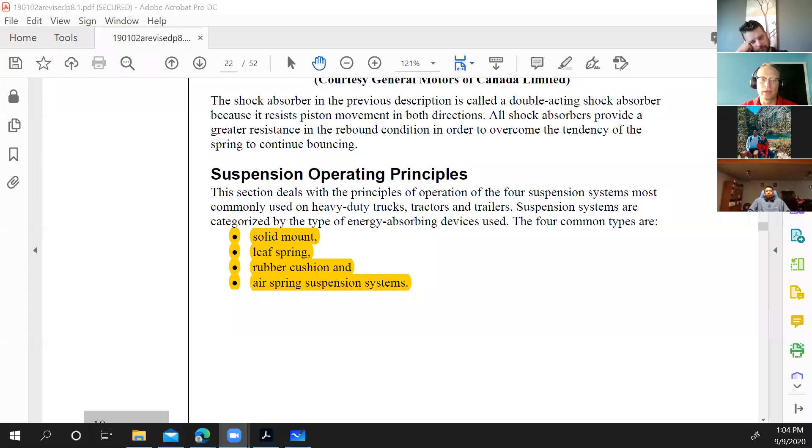Now I'll share the screen. There we go. Can everyone see where we left off? On suspension operating principles.

Sorry if I keep coughing. Water here. One of the downsides from working from home for me, I think, is there's too many cigarette breaks too easily. So having to leave work to smoke is probably a good thing for me.

Anyhow, the operating principles of suspension. So the 4 different types of suspension, we talked about 3. The one we didn't talk about yet is a solid mount suspension. Does anyone work with off-road machinery? I'm hoping there's at least 1 or 2 of you who work with off-road equipment.

So typically you'll have what's called a solid mount suspension. So there won't be any particular energy absorbing device, as in there won't be a leaf spring, there won't be an express rubber cushion, and there won't be air springs. What you might see is rubber bushings. They wouldn't be rubber cushions, though. And so a little bit different suspension.

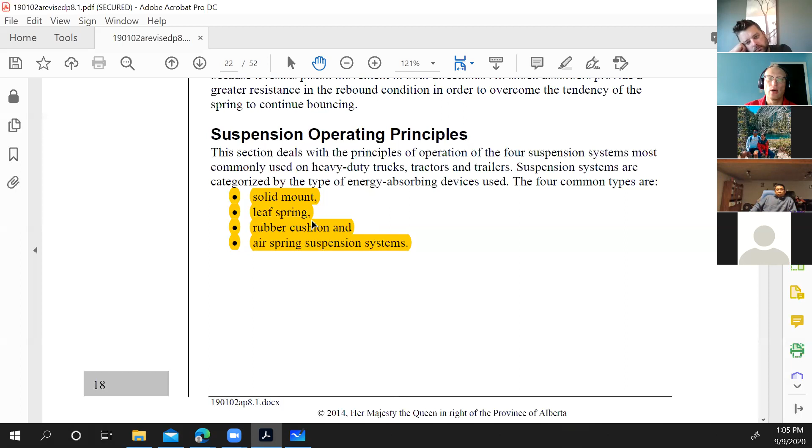Something common for everyone to think about, something we talked about a little bit in section 101, is forklifts. Forklifts have a solid mount suspension. That's because you don't want them to move around so much. So all of the shock absorption happens in the tires, different types of tires you can get with them. Indoor and outdoor ones.

So we're going to talk about how solid mount works, as well as leaf springs, rubber cushions, and air springs. Those are the 3 most common types you'll see, as well as the solid mount. So units that have solid mount suspension will typically have a high center of gravity, operate in an off-road environment or rugged terrain, and require long suspension travel.

So solid mount suspension, yet again, might be where the tracks attach for a bulldozer, that they're on with essentially bearings, so they can move quite freely based on the position of the unit, right? It depends on application.

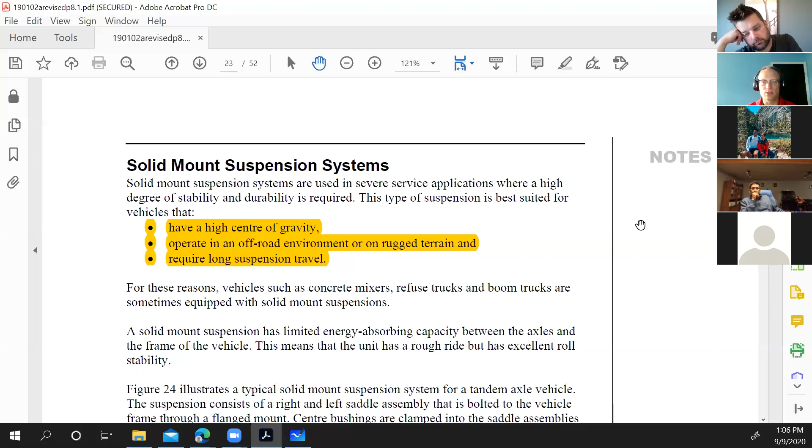For us, for on-road, anything that's going to have a solid mount suspension is either going to be really heavy and really awkward, so they don't want it to move much, as in a forklift, or off-road environments, so really rugged terrain or really rough stuff, and it would beat the heck out of even rubber blocks. So rubber blocks are the next go-to for what's used.

So you can see here is a solid mount suspension. This is a tractor solid mount suspension. You can see you still have the center bushing here. This is where you're going to get your pivoting action. So this is where you get your suspension travel. Okay. They don't want any rubber blocks or springs or any other types of devices in here to limit this travel. This can move freely up and down that way, and also this one will go the opposite direction. Okay. So this is our solid mount suspension.

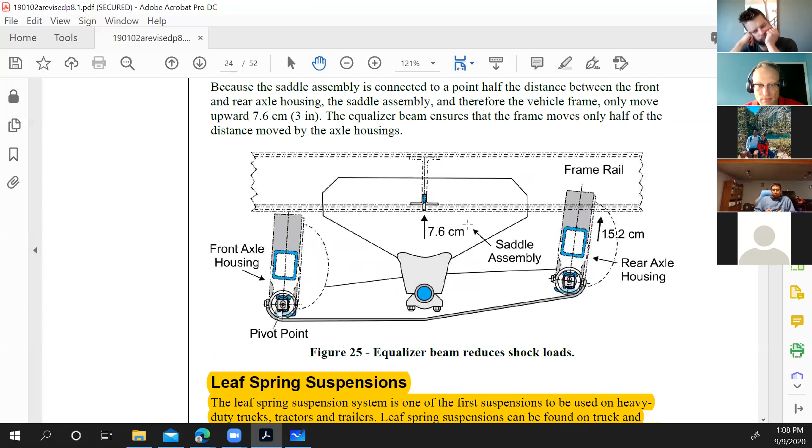What makes it different from any of the other ones, you'll see this whole walking beam assembly underneath here with these equalizer beams and these beams here. This is going to be the same in all of these pictures. What makes it different is this saddle assembly here. That's where you would typically have your energy absorbing device. So what I was mentioning there, solid mount suspension with the saddle assembly here.

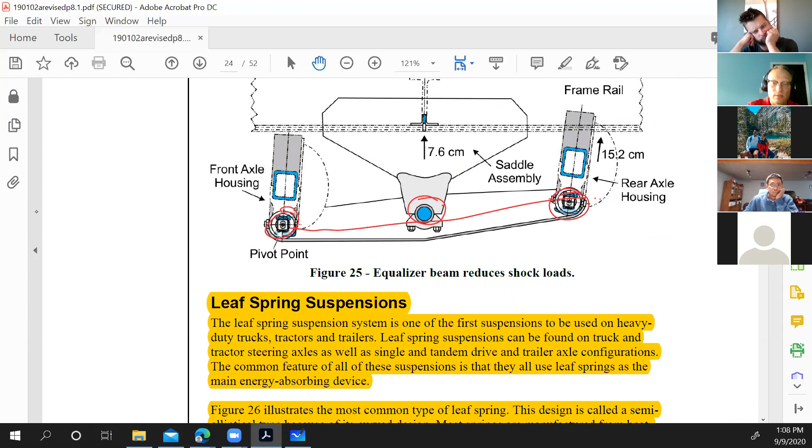What it's going to have is a long suspension travel. The way it does that is through this beam and the pivot points here and the pivots here as well. Okay, that's how it attains this. Now, they call it an equalizer beam because it equalizes the amount of travel.

So what they're saying here, they don't mention it, is if this was going over a bump, if this side was moving down 15 centimeters, then in order to ride up this bump here, this drive axle had to lift 15 centimeters. The equalizer beam splits the difference.

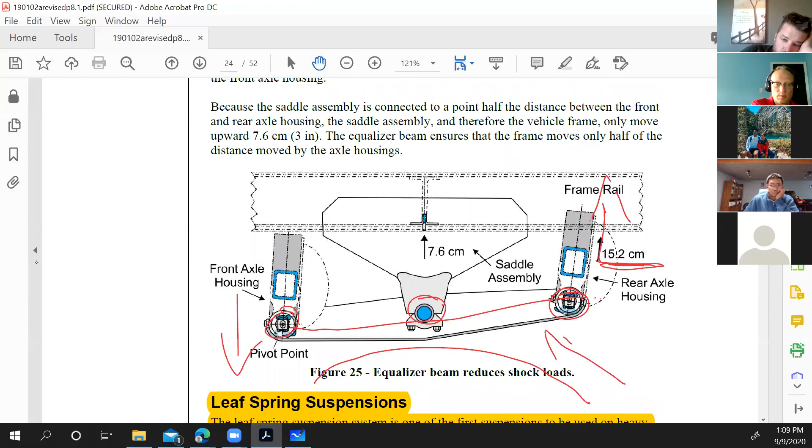Sorry, I just got an email from help desk. That's why I was distracted for a second.

The equalizer beam will split the difference, and the frame will only end up having to lift that 7.6, or half of what this is. Okay. They do have these on 45 tons on the steer axles, actually, these equalizers. Oh yeah, on twin steers.

Yeah, you bet. Would it have a leaf spring right here then as well? 2 leaf springs. So where those rear axle housings are, there'd be connectors or whatever. Yeah, there'd be the leaf springs, one on that side, one on that side, and it's kind of hard to explain, but one's on the bottom, one's on the top, and they act with the springs. Gotcha.

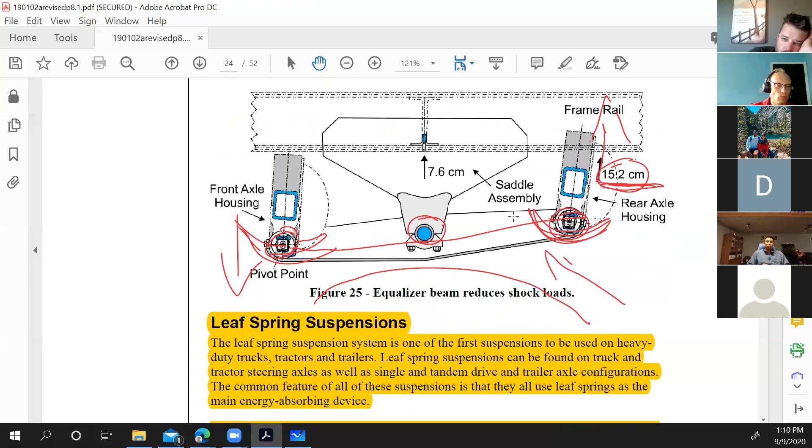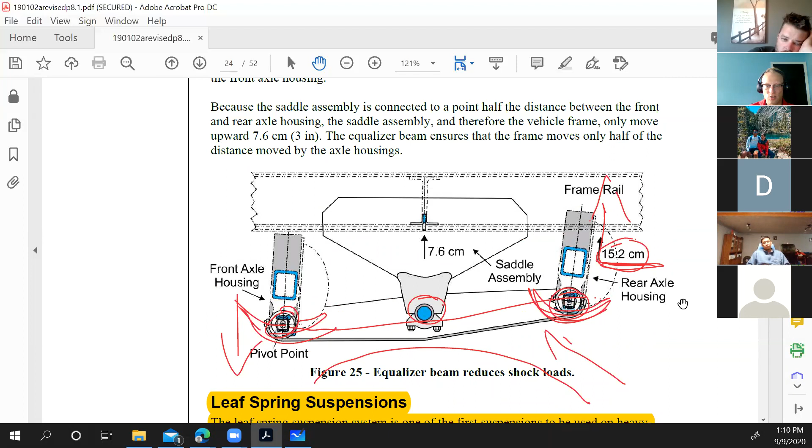Bed trucks are their own beast. They're their own unique little world. So they have their advantages and disadvantages for working on them from our perspective. So we got twin steers, and they even make tri steers now. So depending on where it's designed to go, what it's designed to do, yeah, it absolutely could have something like that on the steer axle. And it might have drive axles that look like this too, right? It can be a twin steer, quad drive, all kinds of crazy things can happen, right?

Sorry, go ahead, please. Savanna Well Servicing has some dog houses with 3 steers. Yeah, it's crazy. It's crazy. It can become a lot, and I mean, just trying to carry more weight is all they're trying to do, right?

So leaf springs, they were one of the first suspensions used. They're pretty basic. They're found on all kinds of applications: trucks, trailers, steering axles, drive axles, singles, tandems, tridems, all different kinds of trailers. On bed trucks, they're all over the place. So the most common type is called a semi-elliptical because of its curved design. In order to make spring steel, it is heat treated specifically to have a spring characteristic. So if you heat a spring, you will lose its springiness, which means it will bend and just remain permanently deformed.

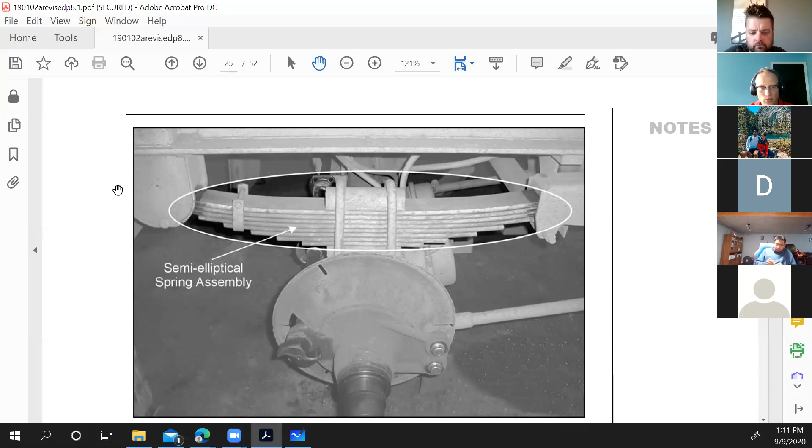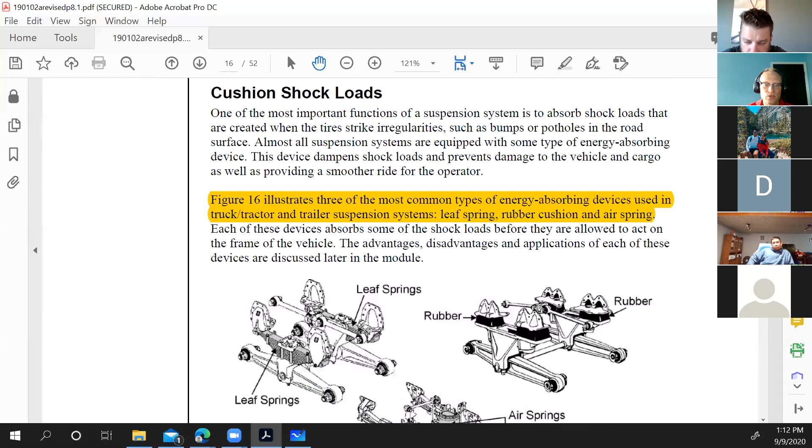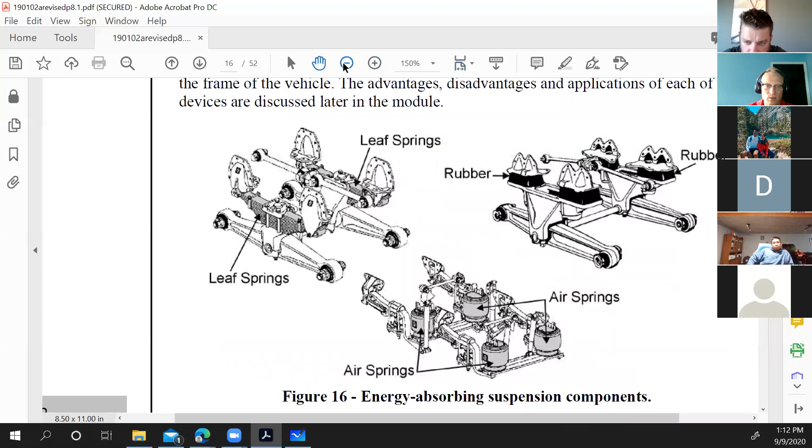So for us in heavy equipment, springs look a little bit different than they do in your pickup truck. Well, they look the same, just a lot bigger. A lot thicker material in each leaf, and typically a lot more leaves in each pack, okay? Something that is quite common in our industry is a leaf spring suspension like this, okay? Similar equalizer beams, and here you have that energy absorbing leaf spring assembly. And we'll get a better picture of that in the next ILM.

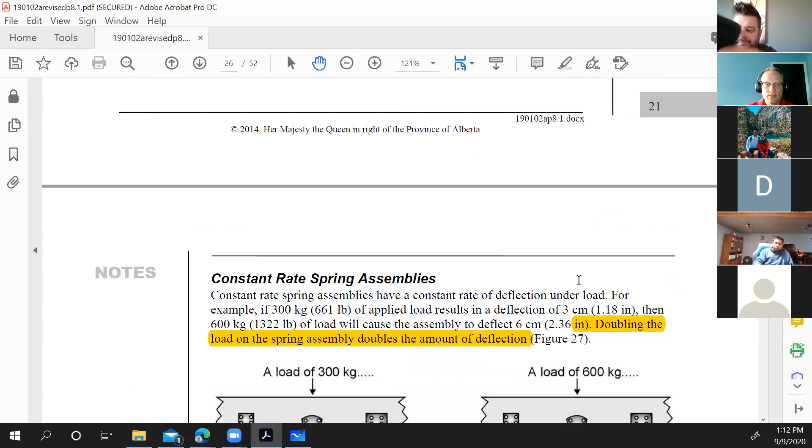So 2 different types of leaf springs that we have: constant rate leaf spring and progressive rate leaf spring. A constant rate leaf spring, no matter the weight you put on it, will deflect or compress the same amount. So if a constant rate leaf spring with a load of 300 kilograms deflects, you can see how it's getting closer together here, right? The arrows are pointing up and the frame is coming down, it deflects 3 centimeters. So if I double this, if it's constant, this should double as well. And we test it and it does. Okay, so that's a constant.

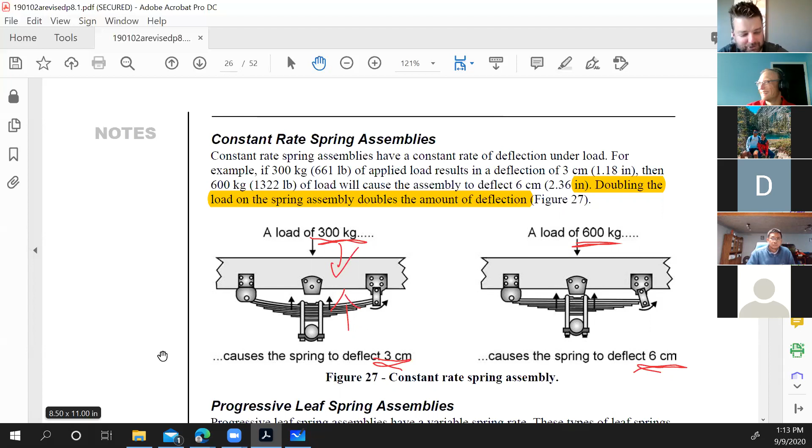Sorry? That was me yelling at my kids again. Oh. Sorry. Mute yourself. There you go. You might even be able to hear things in the background too. There's neighborhood noises around me as well.

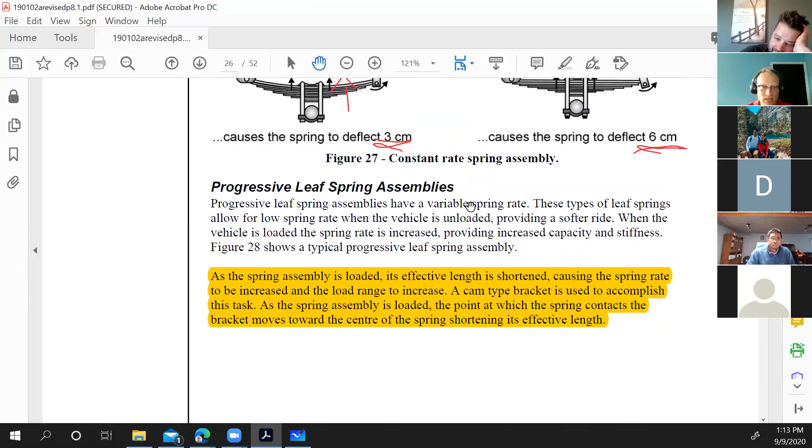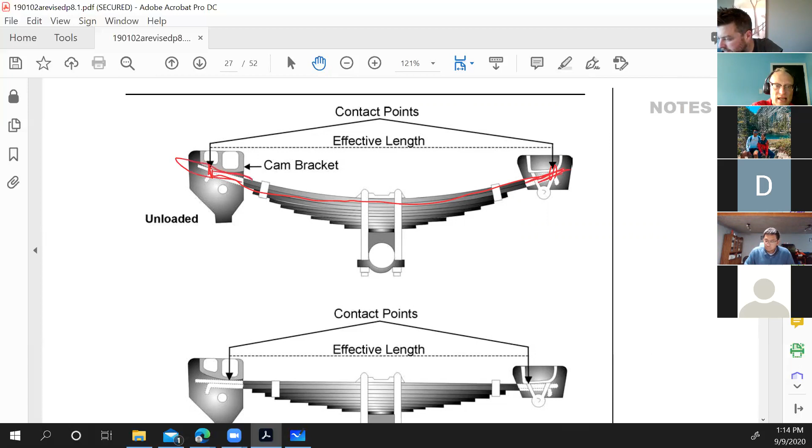As it compresses or deflects, these portions of the leaf spring here and here can slide on these cam brackets. As they slide on the cam brackets, you're changing the point of contact from here now to here, from here now to here. So you've shortened the length of the spring, so it gets stiffer. The higher you load these, the less deflection they get. Okay.

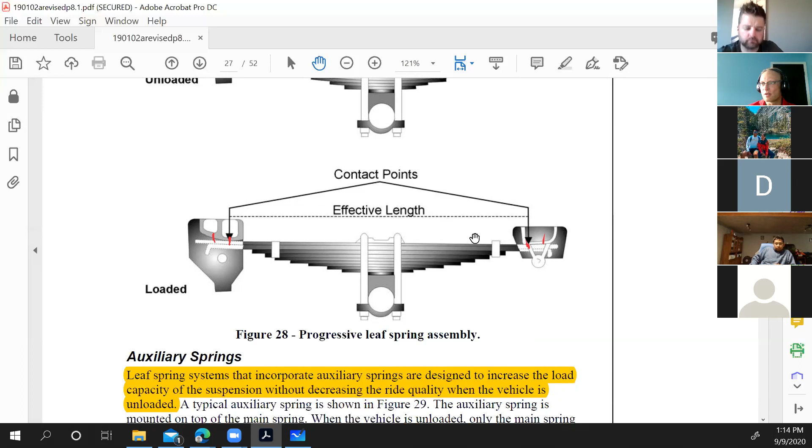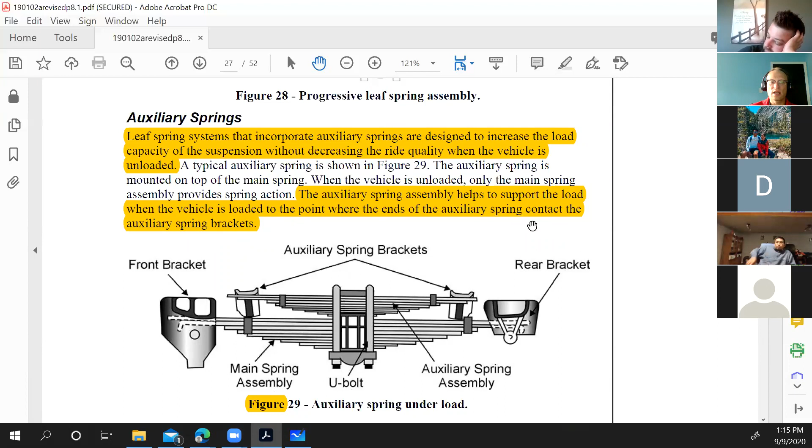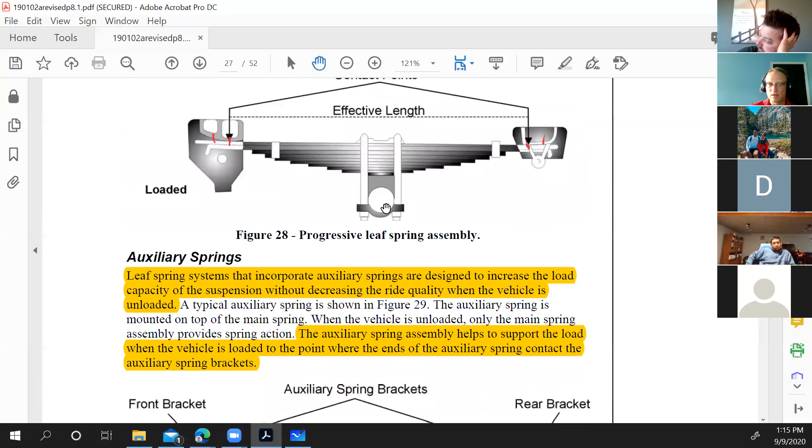An auxiliary spring is just designed to increase the load capacity of the suspension without decreasing ride quality. As you start loading the vehicle up higher and higher, the auxiliary springs make contact, and now they help support the load and help maintain springiness. Because as I keep loading this spring up, it gets stiffer and stiffer. Eventually, it just becomes a solid piece of steel with no spring. This will help bring some suspension travel back. You can see this one's fully extended. This one is as well.

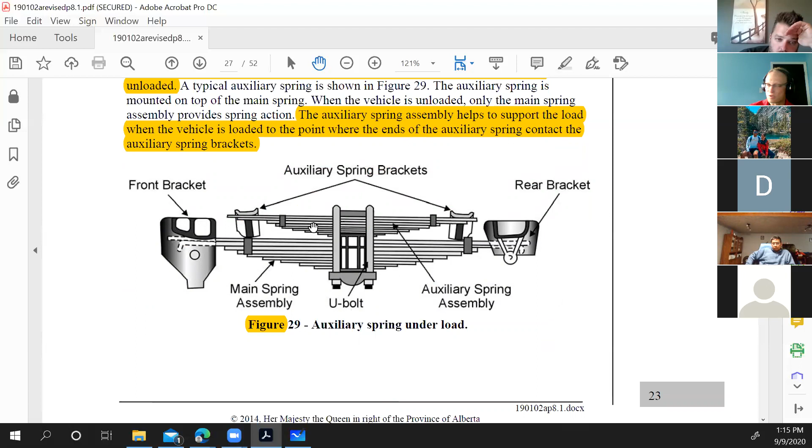Where do we put leaf springs? Most commonly in your everyday highway tractor, pulled off the dealership lot, it's going to be in the steer axles. That's still all over the place. Your front is going to be hooked up with one pivot point. You'll have one here. And in the back, you'll have two. There'll be this upper pivot point, and the lower one will be in the eye of the spring. They'll be connected between the two with this shackle here.

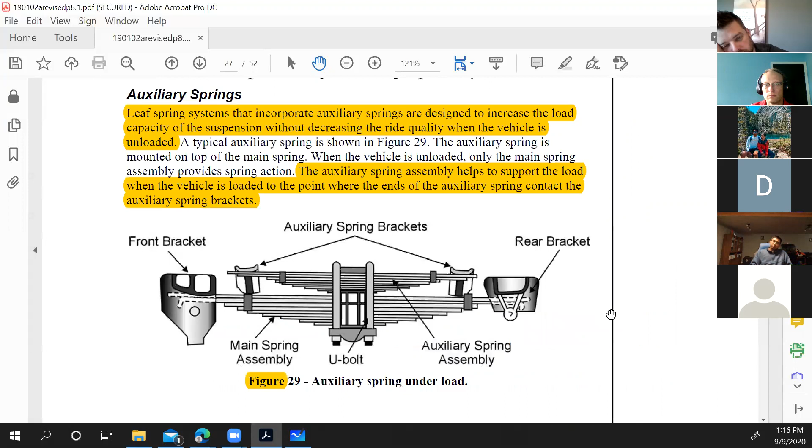Why would we need two pivot points on the rear of this spring? Forward and backwards. Almost. So forward and backwards. Why is something moving forward and backwards? Especially now that I take a look at this picture here.

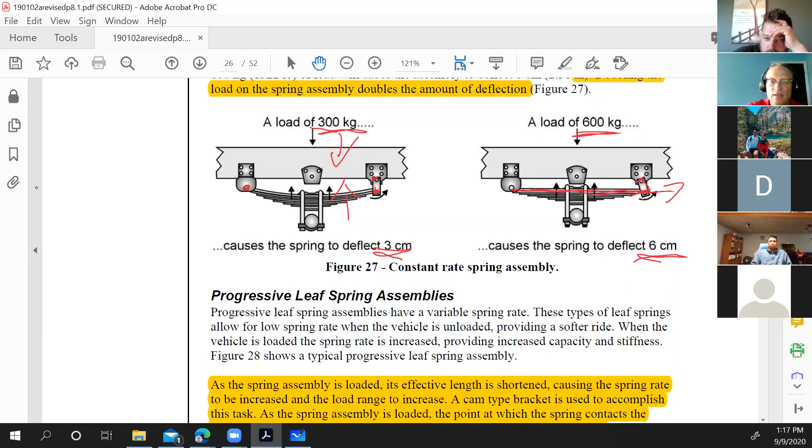Because it gets shorter and longer. Yeah, it sure does. Just like a progressive rate spring, a constant rate spring is going to change the length as well. The thing that doesn't change on a constant rate spring is the point of contact, because we have a solid pivot there, and then the one pivot point there, it moves the shackle back. So the pivot point remains the same, thus the effective length remains the same on the spring. Okay, so that shackle is to accommodate for that change of length. That's how we're going to attain that.

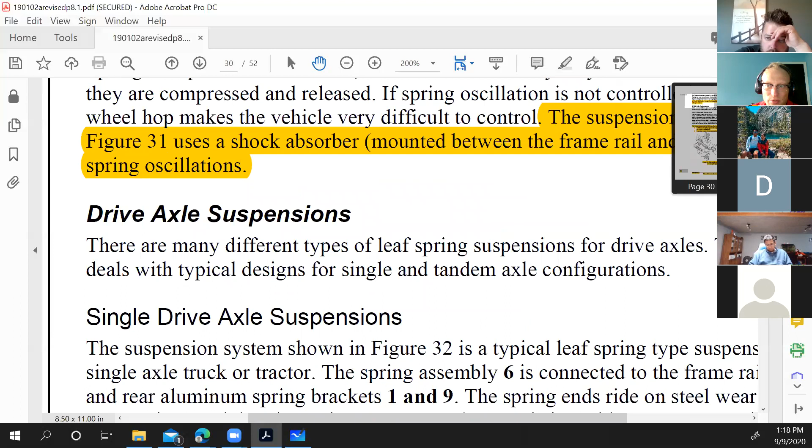Uh-oh, I'm clicking too much. There we go. Zoom out. There we are. All right. So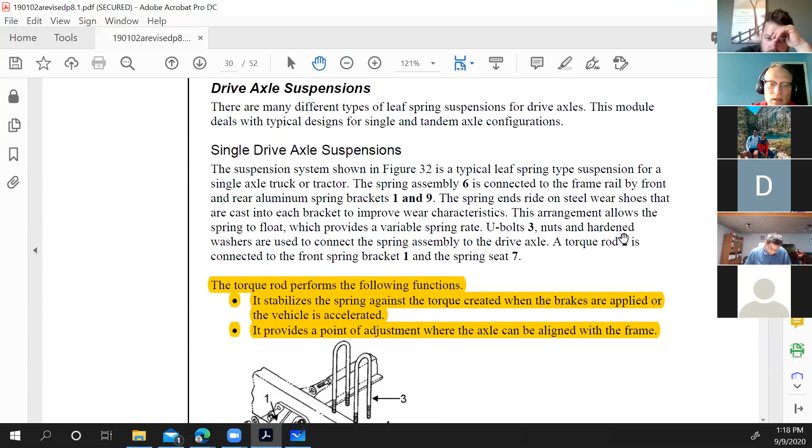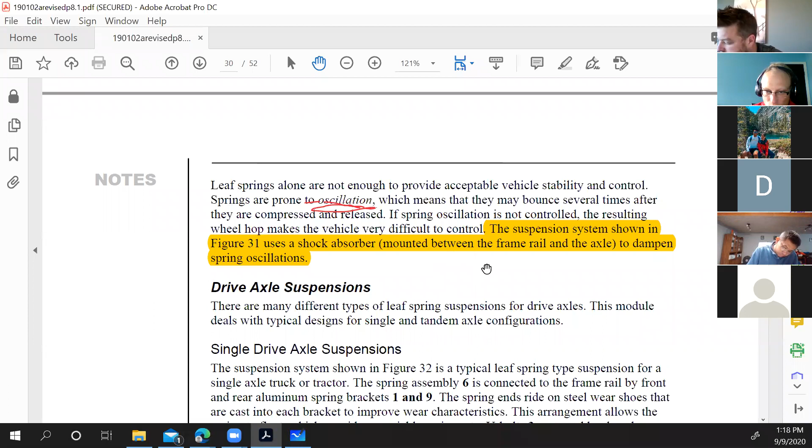They talk here. This is the good paragraph about shock absorbers. So the stability and control is important. Springs are prone to oscillation. Okay, this word is important here, oscillation. It means they bounce several times after they're compressed and released, just about like what I was talking about with that door stopper spring, it'll go back and forth a lot.

So the picture 31, this one here, uses this shock absorber to control the oscillation of the spring, okay? So the spring is what's doing the energy absorption. The shock absorber controls the oscillation of the spring.

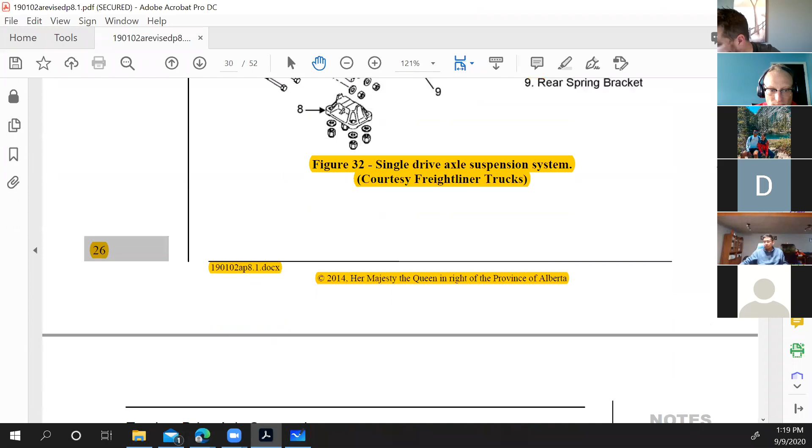Another place where you might see leaf suspensions, but not so commonly anymore, is in the drive axles. Here's a picture of what something like that might look like for a single and for a tandem, okay? Anytime you'd see a tandem, and this is very typical of a trailer, you're gonna see this small assembly here, the equalizer beam. So they act the same function as an equalizer beam in the other instance, they just have springs working between them, okay?

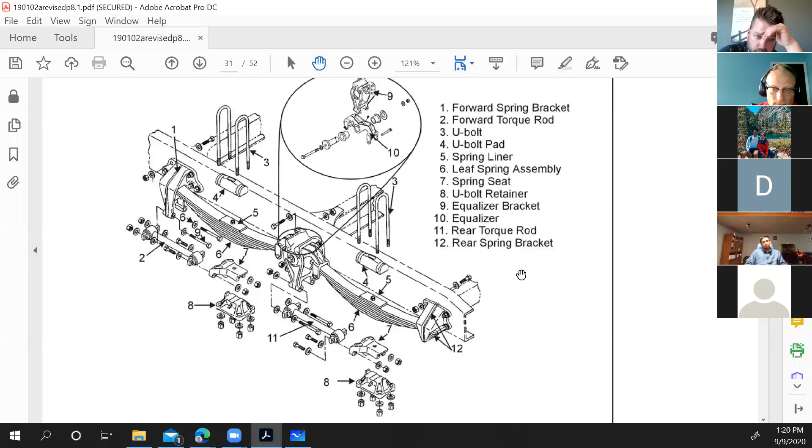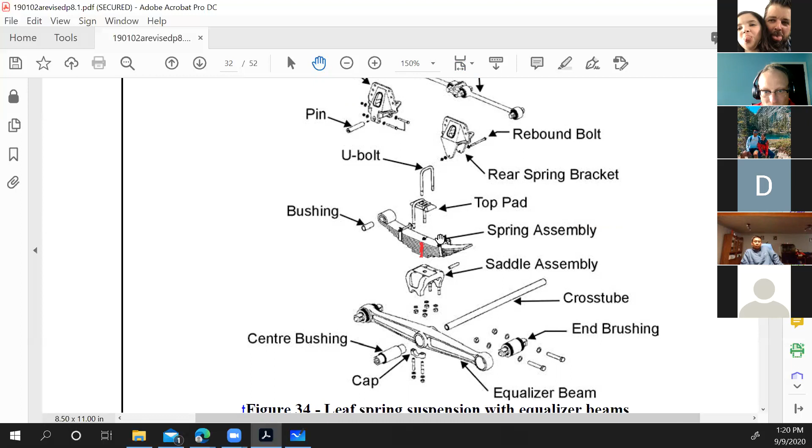And then a different type of equalizer beam single spring suspension. So these ones have an equalizer beam and a spring on each axle. This one has one large spring and then an equalizer beam between each axle, okay? Now, this picture is very, very small. Typically, this spring assembly here that my cursor is on would be 14 to 16 inches thick. So that's this thickness here. It could have 16 leaves and each of them are about an inch thick. So that's a very big leaf spring that's in there.

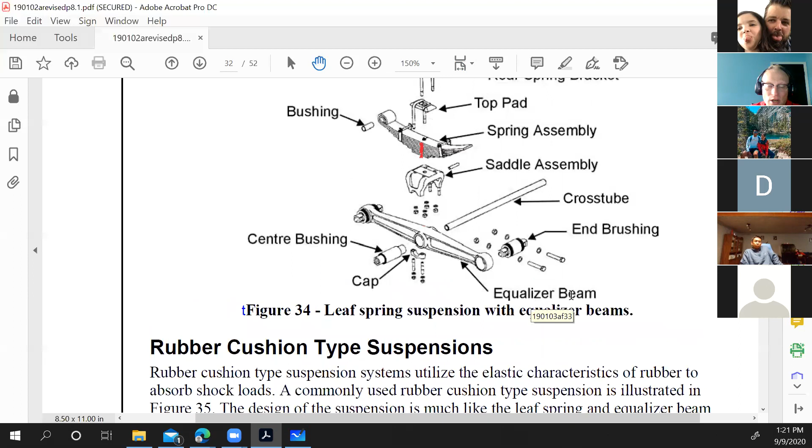Has anyone seen that kind of assembly? Garbage trucks. Mm-hmm. Yeah, I'd have to look at the garbage truck. It was just garbage day today and I didn't look, but next time I'll have to stop them and say, let me take a picture of your suspension. But yeah, I'd imagine a garbage truck would be a good place to have that. And they probably wouldn't even have the biggest ones that I've seen yet. Like, I've seen this on bed trucks and they are very, very, very large.

So for that garbage truck, a big part of that is it's to prevent that lateral movement, because the center of gravity is really, really high on a dump truck, like a garbage truck. And so they have to have that stiff walking beam suspension. If they just had regular bags, they'd be breaking shit all the time.

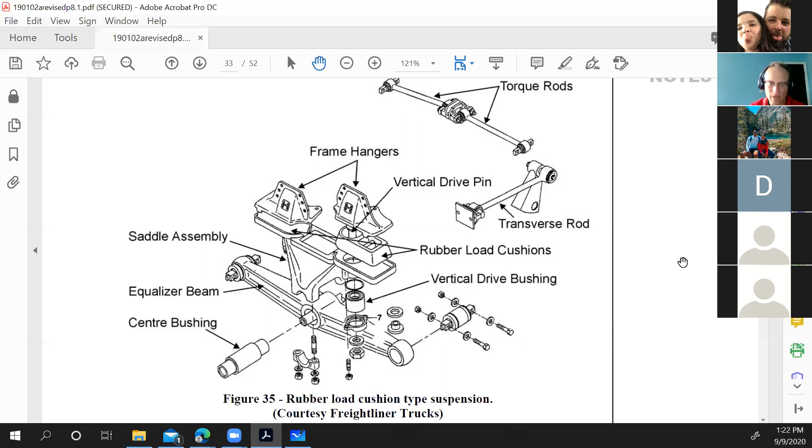Yeah, we are going to talk about airbags, and that is one of the big downsides of airbags is they tend to have a lot of lateral instability because it's just an airbag, right? We've probably experienced or seen on TV what it's like to get on a water mattress, right? Just wavy, it's just a bag of fluid. That's what an airbag essentially is too. So it has a hard time with lateral stability.

First, we'll talk about rubber blocks. So the rubber cushion type suspension, they use the elastic characteristics of these rubber blocks. So if you're starting to notice, so far we've gone from this same equalizer beam suspension having solid saddle up here to having leaf springs. Now we have rubber blocks.

Excuse me, are these where the rubber blocks are located on your units that are out there? Yeah, something like that. It's actually one pad and it looks like an airbag almost, but it's right at the top and it's huge. Not oval, sorry, round. It's almost up here, or right up here kind of thing. Yeah, and it has a big steel hat on it that it looks like it's wearing. You bet, it looks just like that. Okay, just a different kind.

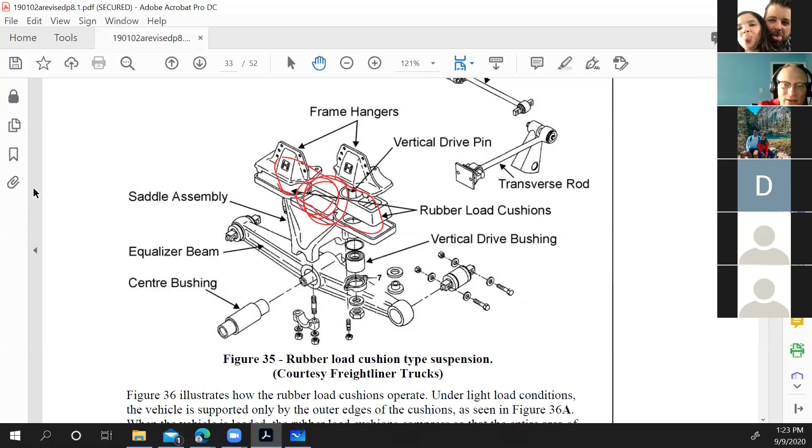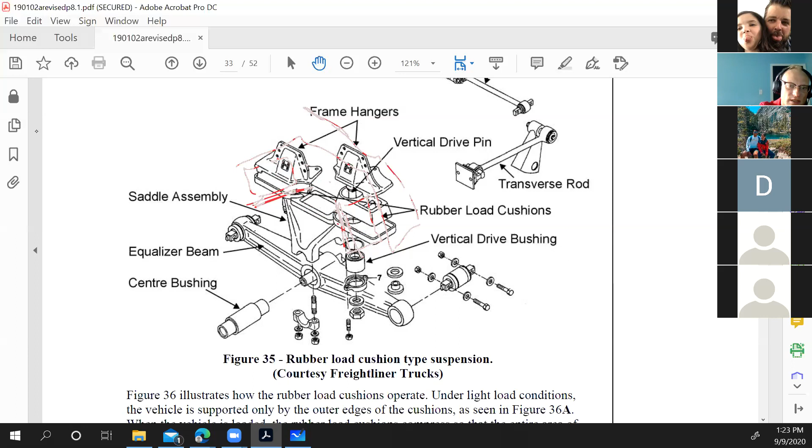There's another kind I've seen where instead of being flat like this, these pieces are actually angled down like this. Then you'd have your blocks here, and there's an opposite piece that would sit up here, and then your frame. We have one bed truck like that as well. Yeah, there's a few different designs of this, all different kinds depending on application. I've seen lots of heavy stuff, that's what I'm used to. So different types, different variations.

One benefit of these is they're actually fairly easy to maintain and change. They don't break often, which is why they're easy to maintain, and if they do, these rubber load cushions are usually really easy to change. They're one of the easier ones. There's very few connector points. Your springs typically have pins and bushings that become seized, and you have to push them out or drive them in, and that's a whole other process. Rubber bushings, if we've done any suspension work, you're pushing those out with presses, or burning them out, and then trying to hammer them in or press them in, hopefully with the right tools.

Airbags also have air lines, and you can blow them up, and sometimes they don't fit properly. These rubber load cushions, if you have the ability to lift the weight off of the suspension, it's usually just a few fasteners. In this instance, it's one large fastener, but other than that, it's pretty easy to change these from my experience. They're one of the easier suspensions.

So while the rubber block is working, it is actually compressing like this. This is what the manufacturer is saying. When there's no load on it, it's fully expanded; there's no energy stored inside. There's a portion in the center of the block, and I wish I had the block here to show you, where the center portion is shorter than the outsides. Once you start loading it up with gravel, sand, whatever it may be, these start compressing and squishing out and expanding, and eventually the center one will also start supporting weight.

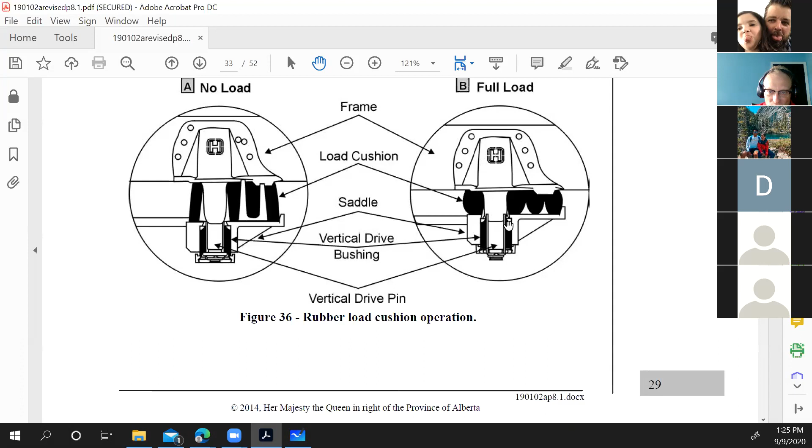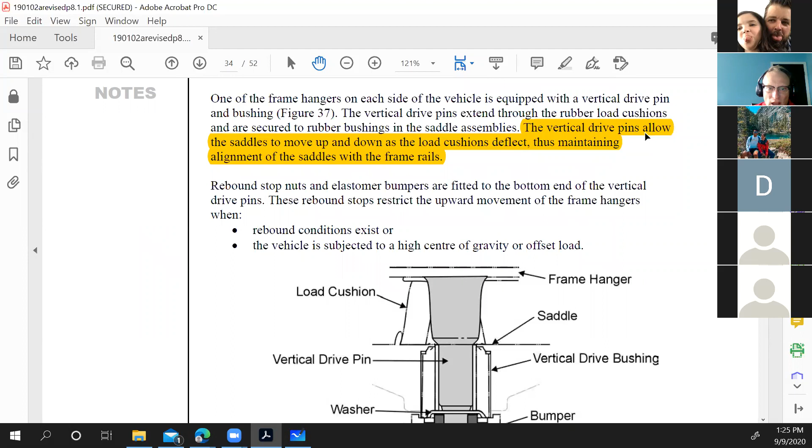The other important component of these is this vertical drive pin. This holds your lateral stability as well, and there is a bushing in here, so it does allow some slight movement, but not out of control. It maintains its positioning. A vertical drive pin allows the saddle to move up and down as the load cushion flexes and maintains the alignment of the saddles with the frame. So as this is moving up and down, it's not allowed to shift side to side. That's what this vertical drive pin is doing.

Air suspensions. Air suspension has superior ride characteristics. They reduce driver fatigue as well as damage to cargo and the vehicle. Now, that is especially a problem of long haul cargo carriers. If you're hauling toys to Toys R Us from Ontario to Alberta, air ride is what you're going to want on your trailer, and it's what you're going to want on your tractor.

And the largest portion of trucking, if we look globally, is that: product delivery, moving things from point A to point B over long distances. A lot of times you're worried about the condition of the vehicle or the cargo, and you need to reduce driver fatigue because they're driving for the maximum amount of hours and kilometers.

So for its place, air ride is the best. It's great. That being said, for off-road, rubber cushion is the best. In some instances, if you're looking for inexpensive, durable, and overall good, leaf spring is the best. It's the best for whatever your specific needs are. That's always what it comes down to.

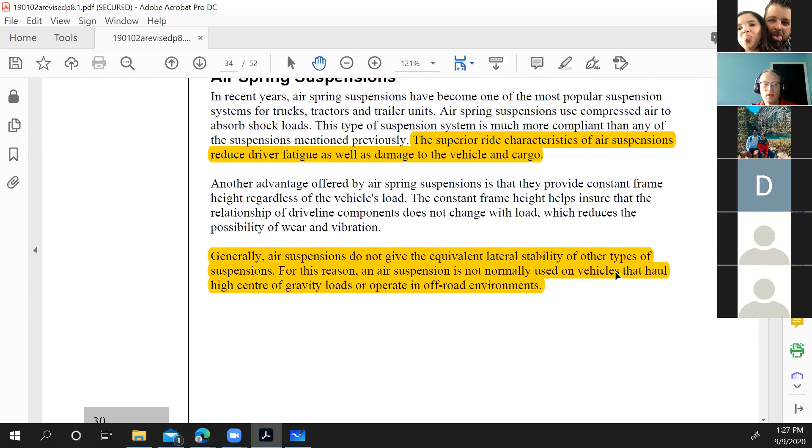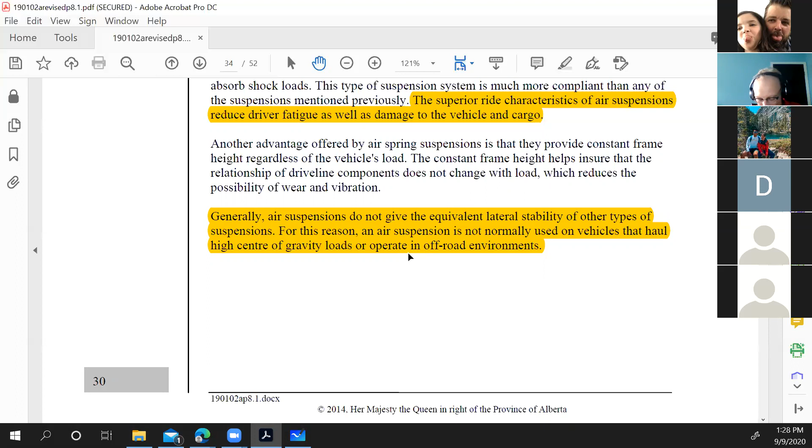Air suspensions don't give that lateral stability, so air suspension is not normally used in a vehicle that has a high center of gravity or operates in off-road environments. Now, do you see tractors out there in all kinds of crazy places with highway fenders and airbags that look like they should just be on paved road? Absolutely, these things do happen. Is that the guy who's probably breaking down and getting stuck in the mud a lot? Most likely. Maybe his vehicle wasn't spec'd properly to be out where it is. Do you guys encounter that out there?

I hauled fuel for about 4 years, and all of ours got air suspension on them. Mm-hmm. Most of our trucks that go to and from a bunch of the mills all over the place end up driving through lots of mud and everything. And they probably all have air ride on them though. Yep. Oh yeah. So do all our units.

For tractors, it's almost the standard now. You have to try pretty hard or look at something very specific to have a different kind of suspension. Air ride has come a long way, and it's not necessarily that they've made airbags any different. It's all of the other components that go along with it to maintain stability.

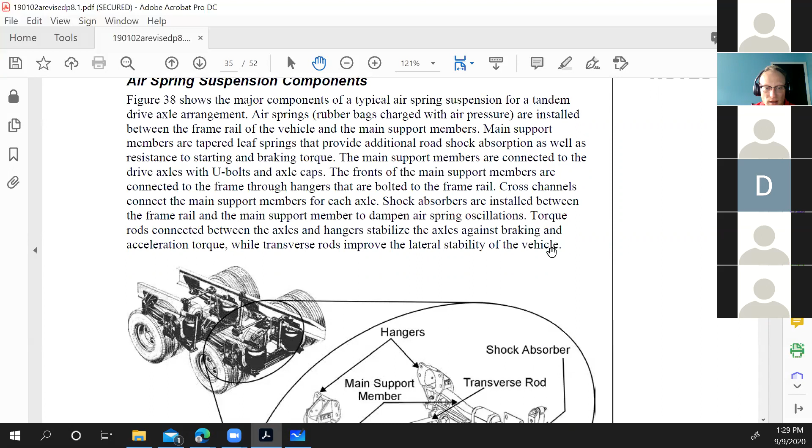The one thing you won't see is trailers with certain suspensions in certain applications. They come pretty specific, but yet again, airbags are becoming the most popular almost all across the board. So they're working with it, and it's because they do like the characteristics of airbags. They are nice, and there's one huge advantage to airbags. Anybody know what it is off the hop before I keep going?

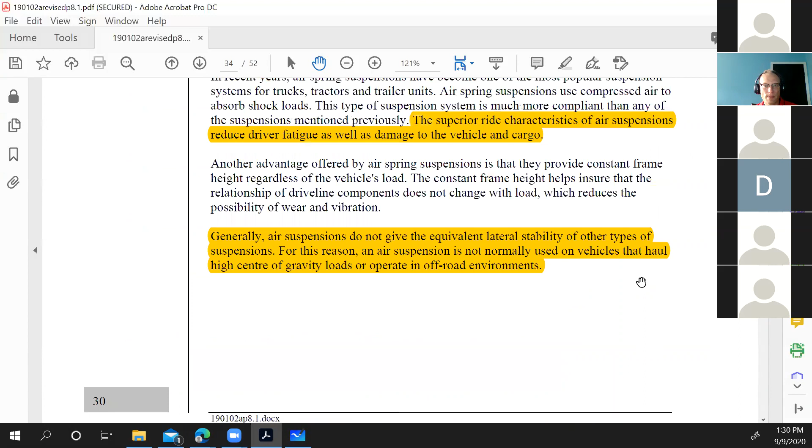Smoother ride. Smoother ride, but what else? I skipped over it here. You can raise and lower the height. Oh, okay. That's probably actually not an advantage. That's a disadvantage. But it depends on the application, because there are applications where you do need to adjust height. And you're right, with tractors, you should dump your airbags before you pin up. That's supposed to be standard practice.

For trailers specifically, no matter how much load you put on your airbags, you're going to maintain constant height. That's the big advantage of airbags. As you add load to the vehicle, it maintains the same height because it can just put more air pressure in the airbags. So that's why everyone likes airbags. No other suspension can do that. You can't lift the leaf spring up. You can't lift the rubber cushion up. A solid suspension doesn't deflect, so you can't change it. But the airbags maintain constant ride height.

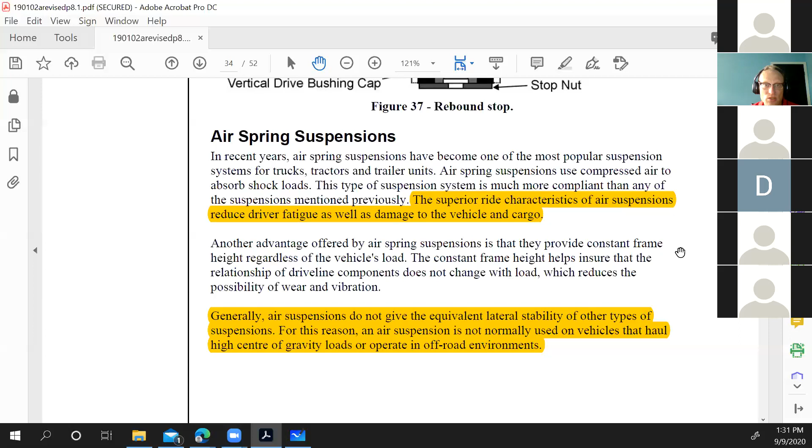As opposed to a solid mount suspension, which would maintain constant ride height at the expense of comfort. There was no comfort in there. If you've ever driven something like a wheel loader across town or on public roads where it's quite bumpy, you'll know what a solid suspension is like. It's really, really jarring.

That being said, air suspension does probably require the most components out of any of them. Not only are you going to have air springs and almost always shock absorbers, and this picture is a good picture of what gas-filled shocks look like. I was picking out Peterbilts before, but a lot of times this shock absorber might be gas charged, so as soon as you take the bottom or top mount out, it would want to expand on you.

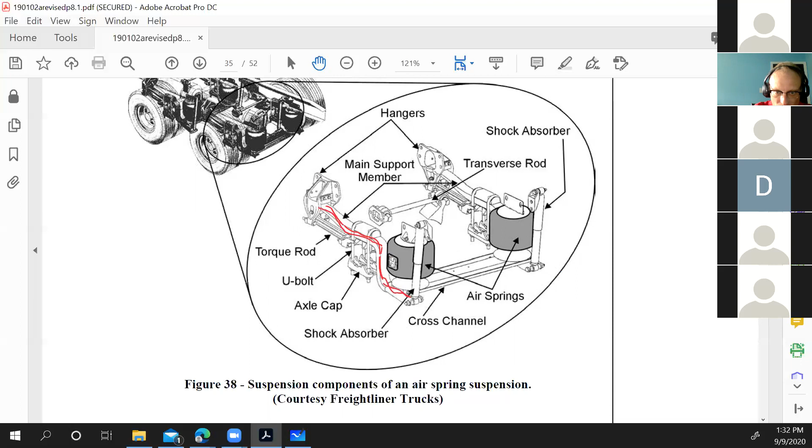Now, the other thing, this main support member in here is actually a spring as well. Some companies actually call it a spring. In this picture, they aren't. They're calling it the main support member, but this piece is designed as a spring in some applications that could look just like this. And we still have our transverse and longitudinal torque rods serving the same functions.

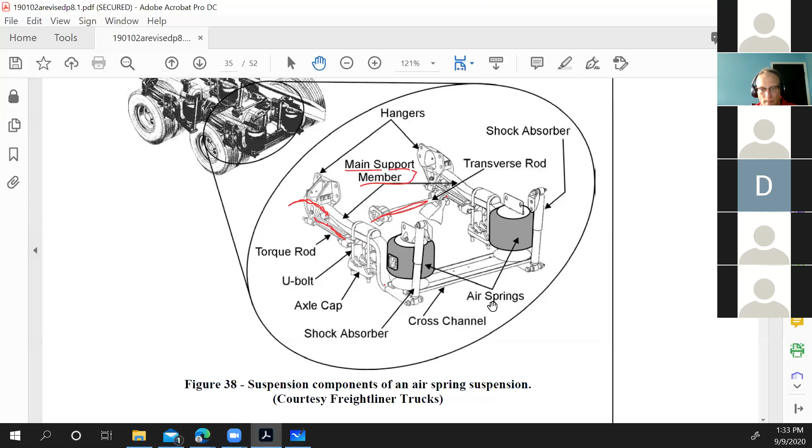This spring in this instance wouldn't actually be solid inside of any pivots. This spring would just be able to ride freely and would come out as a hook on the front. And what limits its travel is the torque rods. So before I go any deeper into the air system, because it's the most complicated one, has anyone got any questions so far?

Did you ever mess around with that Neway 8-bag system? With a Neway 8-bag system, like on Kenworths? Yeah. Oh yeah. Unfortunately, way too much. That's a thing of the past now, I think. Well, I bet you could probably buy a brand new one with it. I don't know for sure. It's been a few years since I've been out of it, but they were selling brand new ones when I was still pulling wrenches 3 or 4 years ago.

That's the one, and it has those solid pipes that go up, drilled holes in the web, and goes to really big fittings on the top of the airbags, right? And there's 2 airbags per wheel end, essentially. Yeah. We had them on. Ferris has a bunch. Go ahead. Sorry.

Go ahead. Ferris has a bunch of Peterbilts. They're like that, just the day cab ones that they pull their N2 trailers with. They're all 8-bag trucks. Yeah, it must be something Paccar did then if Peterbilt has it. So, right, Kenworth and Peterbilt are the same company. They're both owned by Paccar. So,

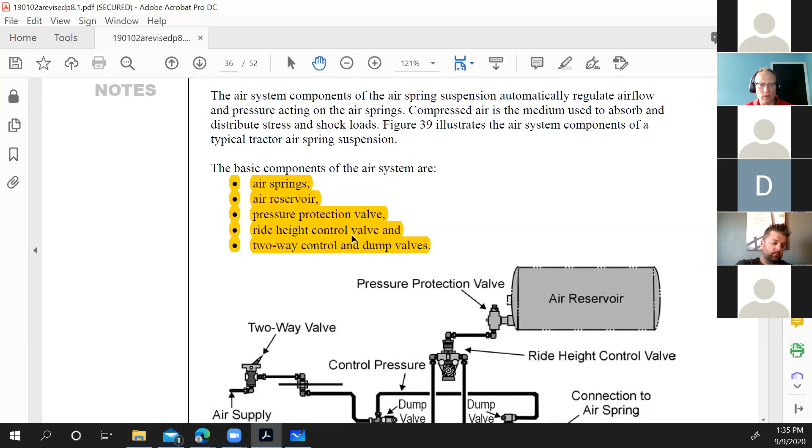there were some advantages to that system as well, and in their application, they might have been good. And I'll get to that once we talk about the ride height valve as well. So all the additional components you're going to need to make your system work now. You're going to have the air springs. So to make your air springs work, with bags, you're going to need an air reservoir, pressure protection valve, ride height control valve, and a 2-way dump valve.

So that's how we can dump that suspension out at the end of the day or when we're parking or hooking up or whatnot. We're fortunate because we have air systems on our unit. Air is how we get our braking still, so we have regulations about air. We'll talk about the air systems, how we get that air, later on in the next few weeks as well.

Right now, we just need to make sure we know that the air going to the suspension system comes from a pressure protection valve. Now, what this pressure protection valve does, and it doesn't say it, it does it by mechanical means, is at 70 PSI or less, it's going to close. It's closed off.

So that's why in the morning when you start up a tractor and it's airing up, and then all of a sudden you feel all the airbags lifting up at the same time, the ones in the cab and the ones in the suspension, it's because you just went over the pressure protection valve pressures, okay?

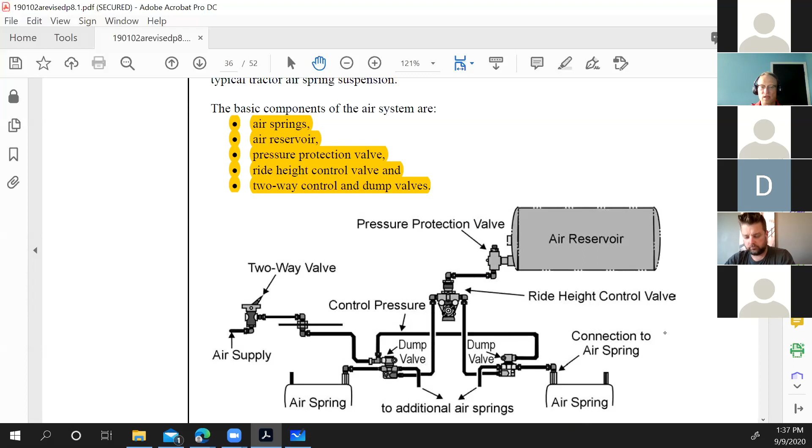The idea behind that is if you get a large leak in your suspension and you can't keep up enough air pressure in your braking system, so your air supply system can't keep up to the leak in your suspension, can't maintain 70 PSI, it'll close that pressure protection valve and you will have air in your braking system, at least 70 PSI. Sometimes they're set differently, but we'll talk about the exact number that's regulated.

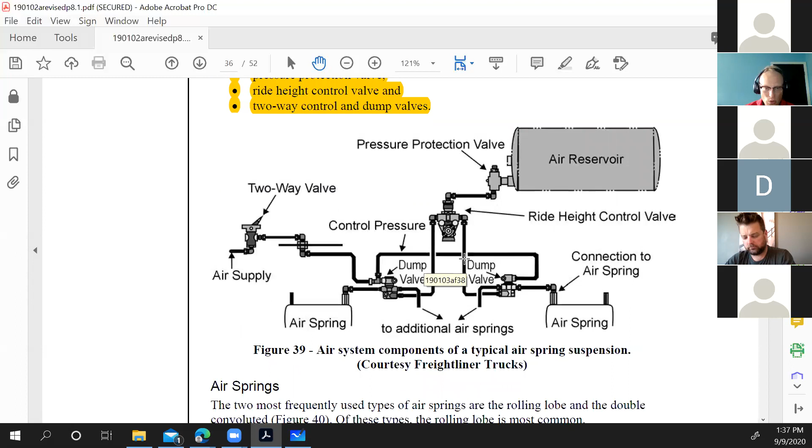So this ride height control valve and this dump valve a lot of times can be integrated into the same component nowadays, and this 2-way valve is going to be what's inside of your cab, okay? So the air springs, this is the airbag itself. How they look inside, okay?

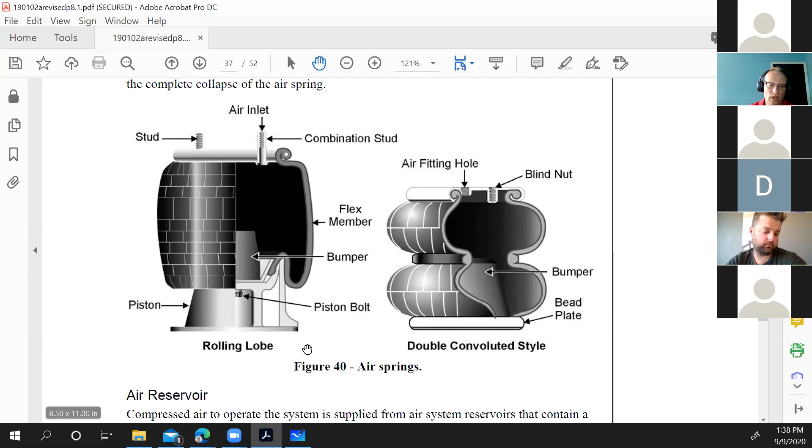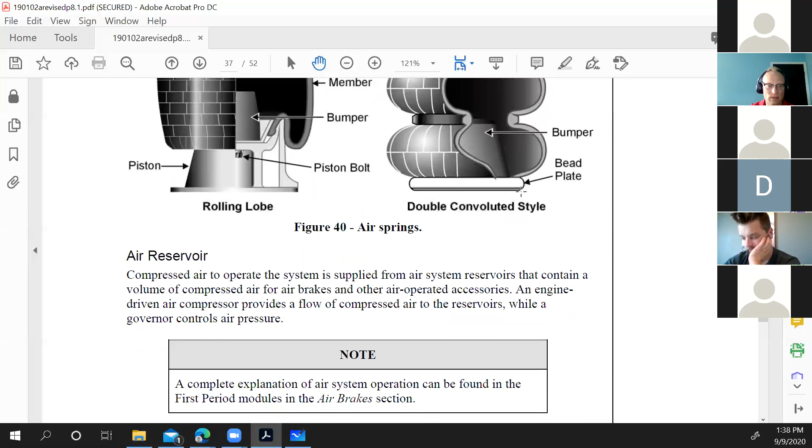And then just a different design of airbag that has 2 bladders, and the manufacturers name these things differently based on the amount of studs, the amount of ports and fittings, the way the base is, the way these lobes are. So if it's a rolling lobe or a double convoluted style, there are hundreds of types of different airbags, okay? If you're looking for what kind of airbag you need for a specific application, the manufacturer, they're the ones who are going to be able to tell you that.

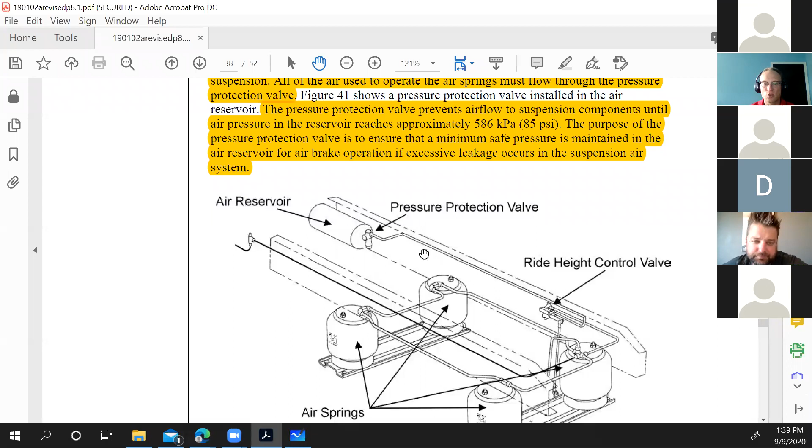And we will go into all of this in the air brake section, the air supply system. Pressure protection valve, so like I said, closes at a certain pressure or opens at a certain pressure. So above 85 psi it is open, allows air to go to the ride height control valve. The ride height control valve, this is going to be what tells the air suspension where you're sitting.

So you have one portion of the ride height control on the frame. It has an arm here, and this is attached to the axles. So the axles move up and down, right? As we're loading up the vehicle, the axles are going to want to do what? Move up this way, right? We're loading, frame is coming down. They're closing this way. The axles aren't moving up. Of course they're not. They're not floating in the air. The frame is moving down, okay? Frame's moving down as we're loading it up.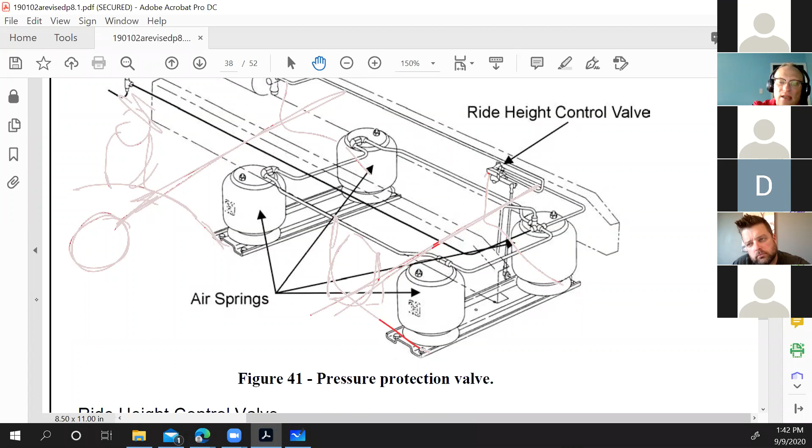Excellent answer. That's why overall we want to do this with airbags. It would be side to side, right? One valve for each side. Yes, yes, yes. So I haven't seen, and not to say it doesn't exist, a ride height control valve on the back axle and then one here that would be on the front axle. What I do see a lot, and especially on that 8-bag system, is I'll see one on this side on the back, and then I'd see one here on this side on the back.

And the idea behind this is, I've seen it too on gravel trucks or things that have the potential to be loaded unevenly. If I'm loading this side of the vehicle up here, and let's say this is just a 1-bag or 1 ride height system, okay? So however it is, the guy with the scoop, the person driving the auger, whatever the reason is, I am only loading from the one side into my container. What's going to happen with that vehicle? It's going to start to lean.

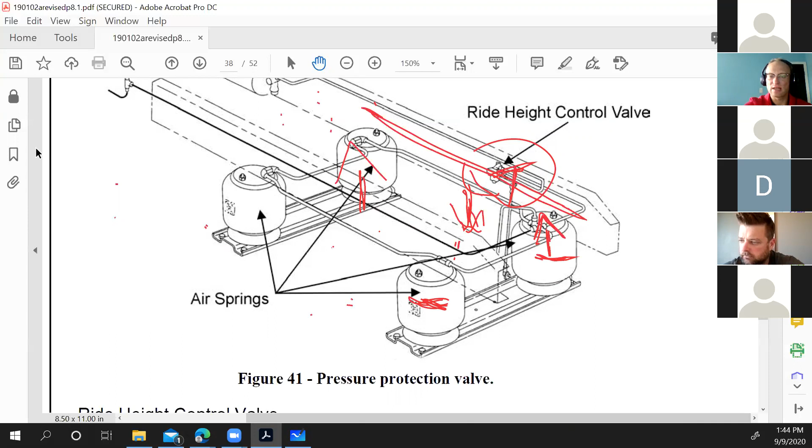Well, so that means it's going to go down on this side. The frame on the other side is going to go up. Now, the airbag here is going to start going like this, and it sees it's getting closer together, so it's going to fill this side. You're going to have uneven suspension filling, and this side's going to be filled with the same amount of pressure as this side. But because this side on the right is heavier, this side is going to start lifting even higher and higher and higher. And you could have a potential problem.

That's how with one bottle jack, I can trick a low bed trailer into lifting 6 tires off the ground on one side. I just push up on the frame and it forces the passenger side down, and it just airs the whole trailer up and stuffs the wheels up in the air. Yeah, yep, exactly. That sounds exactly right. You can do that.

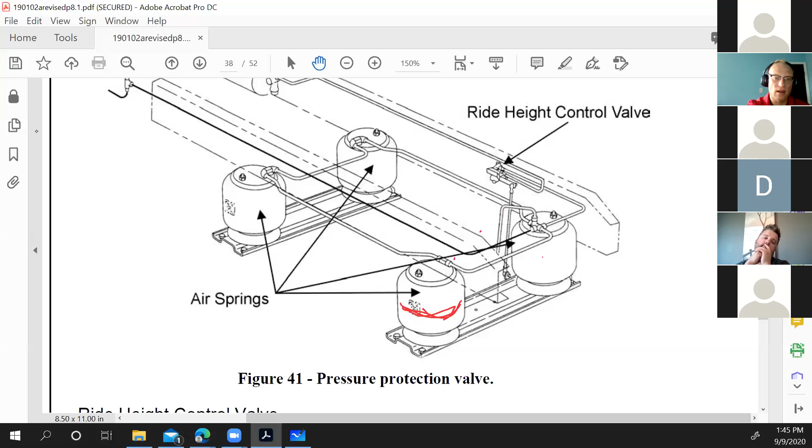So now you can see with that, the opposite would happen if you were loading the side without the leveling valve, okay? It would start pulling this side apart. So the leveling valve or the ride height control valve here would think it is too high. So it would start dumping air. Meanwhile, this side here is getting loaded up. It starts dumping air, so it sinks even lower. This side's still gonna be going higher and higher because it's dumping air as it's rolling, and it's just gonna be a bad thing.

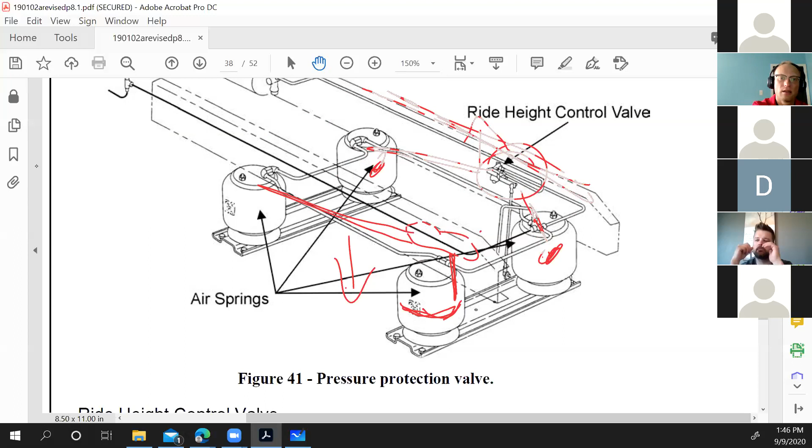So what they did is they put one on each side that controls the side. So then this one would control these two, and this side would control these two. So if they started loading up this side, this bag pressure and this bag pressure can start getting higher because there's more weight on this side, but it would maintain the same level. Make sense? Yep. Perfect. And if you don't get those plumbed in properly, they do really wonky things too.

Now, one of you said one of the advantages is adjustable ride height. It is if it's designed for that. Because if you start playing with the ride height and it's not designed for that, then you're going to start affecting driveline angles. And whoever said that, you're exactly right. That's actually a 4th year thing where we start talking about drive shafts and driveline angles. But yeah, you'll absolutely throw off your driveline angles.

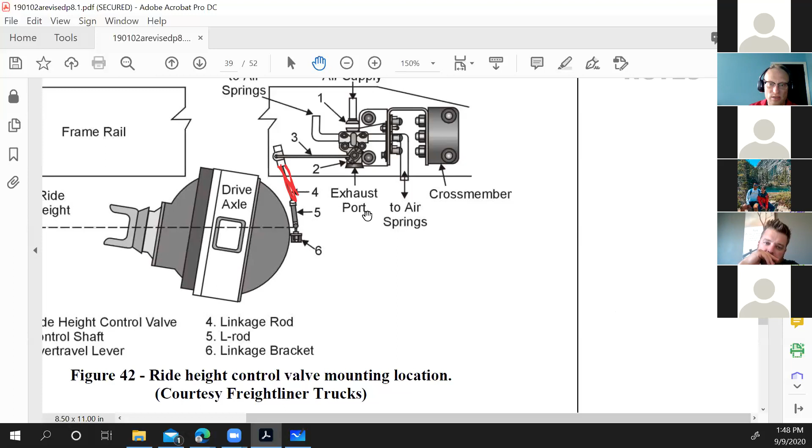You'll also change not the function of your suspension, the reaction of your suspension. If you start changing that height, okay, you'll start bringing things too close to the limits, or you might bring them out of a place where they should be operating in perfect alignment, and so you can experience instability or premature tire wear, any one of those faults. So we should always make sure we put the correct length back.

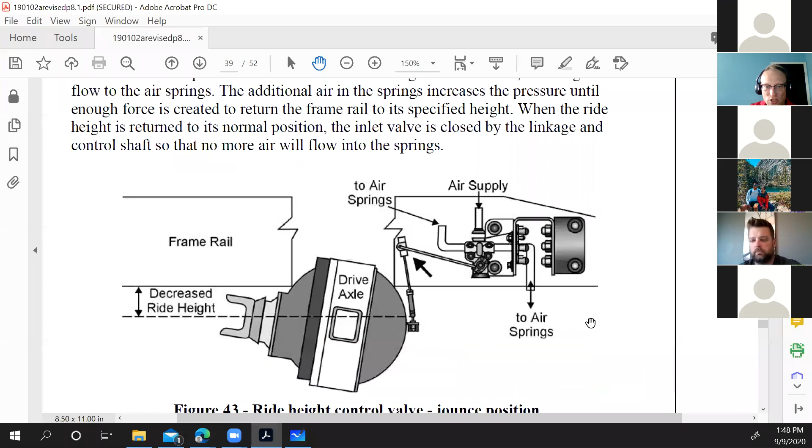You can just see here they're showing how as the ride height has decreased, so we've gone over a bump, this is angled up, and that will open the valve in here. Okay, so it's gone from this position to this one. It'll open the valve, allow air to go to the air springs, lift them back up.

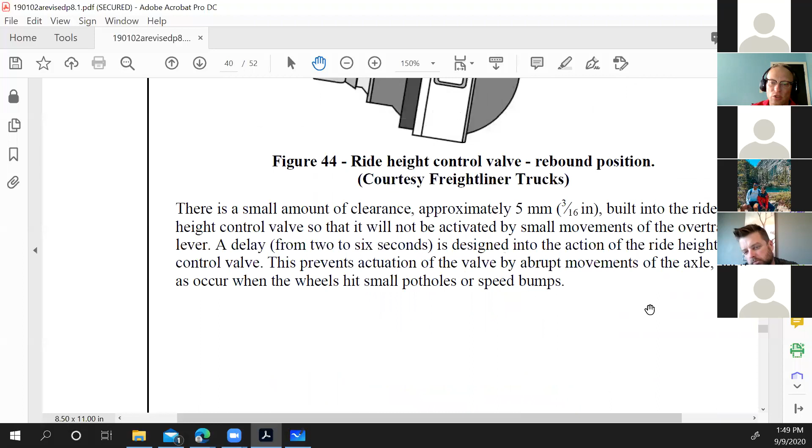Now we've gone too high, so the ride height has increased. We're taking all of the weight off of the vehicle now. So that same air pressure expands the bags even farther. And now it lifts it into the exhaust position. The exhaust port will open, air from the air springs comes out and will drop back down to the proper ride height.

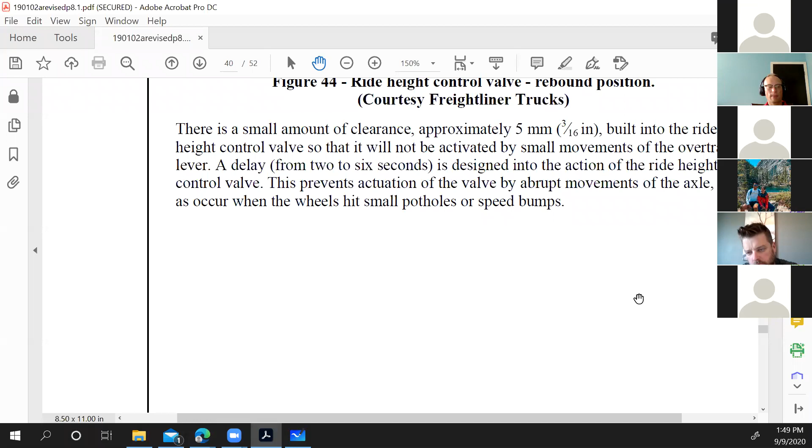So if the arm breaks off or if the nut came off and it fell off, it would go down and sit on the bump stops instead of overfilling the bags? So if this fell off and this arm fell all the way straight down, is that this arm right here? So this nut fell off and this arm, instead of being attached there, it fell off and it was dangling down there. I think that's what he meant, yeah. Yeah, then it should be exhausting constantly and it'll never lift up. So if that's what you're saying, that makes sense to me.

That's when you get your bungee cord and wrap it around the frame. You go back. Yeah, there's a couple other cautions we'll talk about with these as well. They can be dangerous, and I've seen some dangerous situations happen with airbags and the ride height control valve, and that rod as well. Just like what we're talking about too.

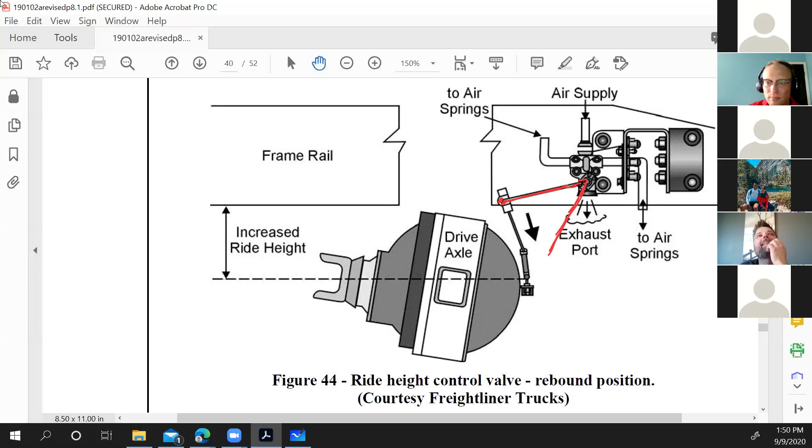So two-way control on the dump valves, they're in the cab, so you can hit a button and dump out the suspension. A lot of times in a trailer, you'll have one in a jockey box or a little control box somewhere, and that's how you'll be able to dump the suspension, okay?

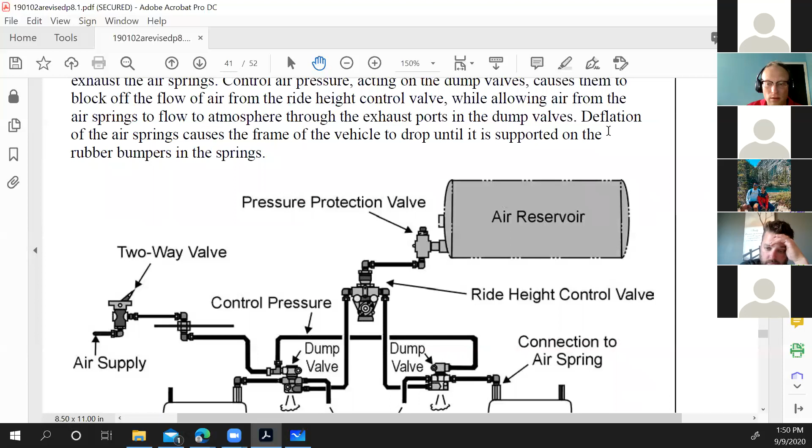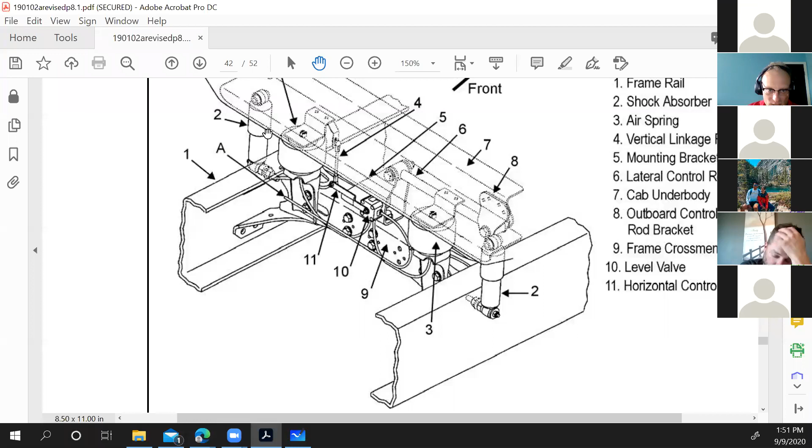And I think, oh, almost. Cab air suspension, exactly the same as frame suspension, it's just on the cab. You're gonna have shock absorbers. If you've ever felt what broken shocks on a cab are like, you know what that spring oscillation is like. This is a good one. It'll just rock and rock. It's like you're on a boat in the ocean, essentially. It'll just keep rocking back and forth.

These airbags, they work the same way as air springs. They're just smaller, very little, about this round, okay? They're very small. They can be easy to change. They can also be very difficult. We'll talk about those as well a bit.

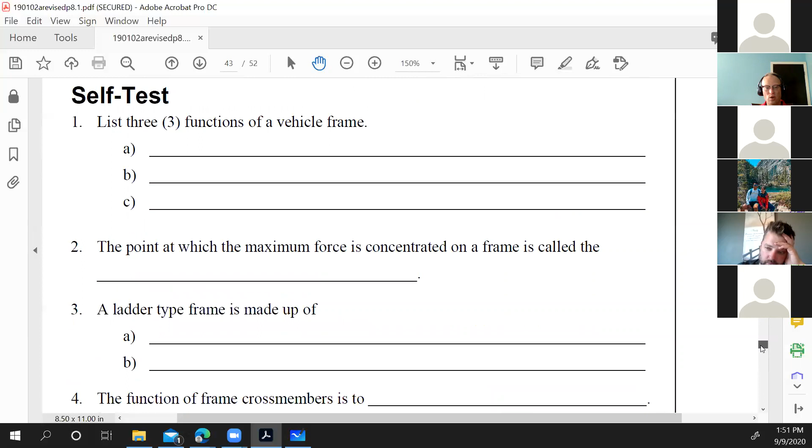Perfect. So what we'll do now, everyone do the self-test, please. This is a really good one. Do all the questions. All the self-tests now start becoming really, really good, okay? We'll talk about it and we'll go through every question. I'm hoping that all of you have seen the importance in doing the self-tests, and I'm going to just take you on your honor today that you're going to do the self-test, okay? So take some time now and start it.

I'm gonna go for a break and we'll come back at 2:20. Okay, and we'll see where everyone's at with this self-test then. Okay. Any questions before I mute and go away for a quick sec?